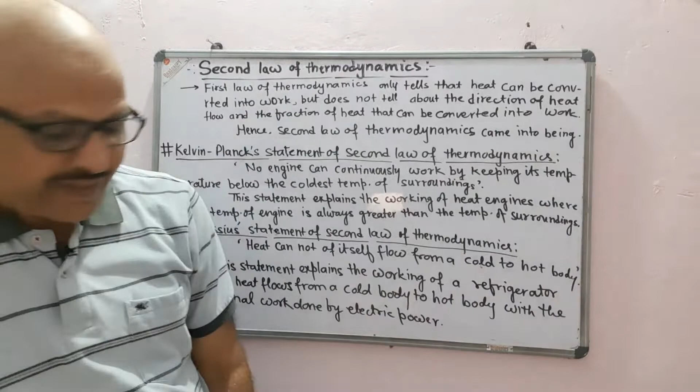Hello friends, next we start the second law of thermodynamics. As you know, the first law of thermodynamics only tells about the possibility of conversion of heat into work, but it does not tell what fraction of heat can be converted into work and what will be the direction of the heat flow. In order to explain these two things, second law of thermodynamics came into being.

There are two main statements of second law of thermodynamics. One is Kelvin-Planck's statement, and the second one is Clausius statement. First we discuss the Kelvin-Planck statement of second law of thermodynamics.

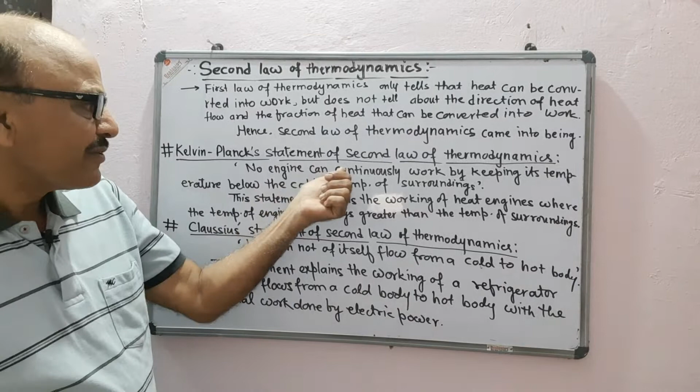It states that it is impossible to get a continuous supply of work by cooling a body at a temperature below the coldest of its surroundings. That is, no engine can work continuously by keeping its temperature below the coldest temperature of the surroundings.

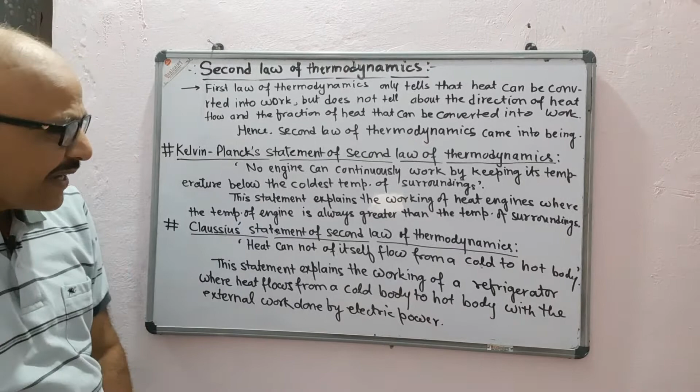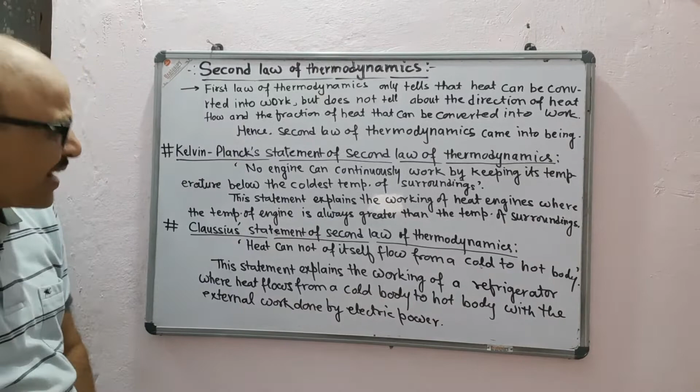This statement explains the working of a heat engine. In every heat engine, the temperature of the heat engine during working is always greater than the temperature of surroundings. This also explains that total heat cannot be converted into work, that is, efficiency of heat engine cannot be 100%.

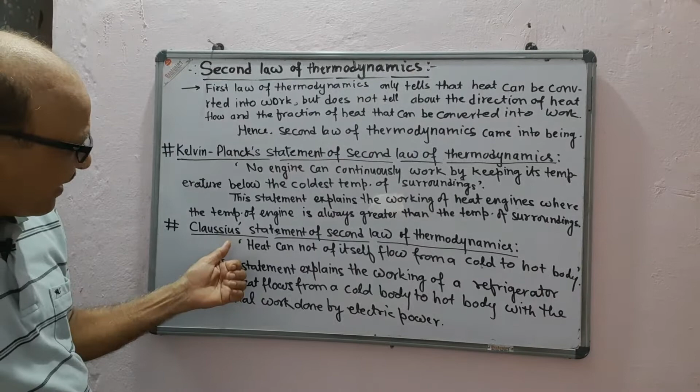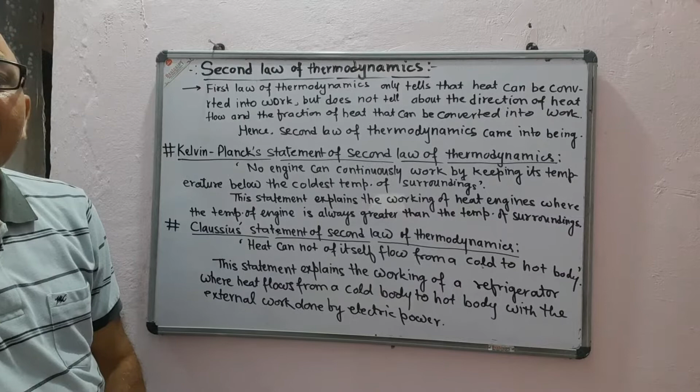Second statement is Clausius statement of second law of thermodynamics. It states that heat cannot flow of itself from a cold to hot body. That is, heat will not flow from cool to hot body by itself; it may do so only if some external force is applied.

This explains the working of a refrigerator, where heat flows from a cold body to hot body with the help of external work done by the electric power.

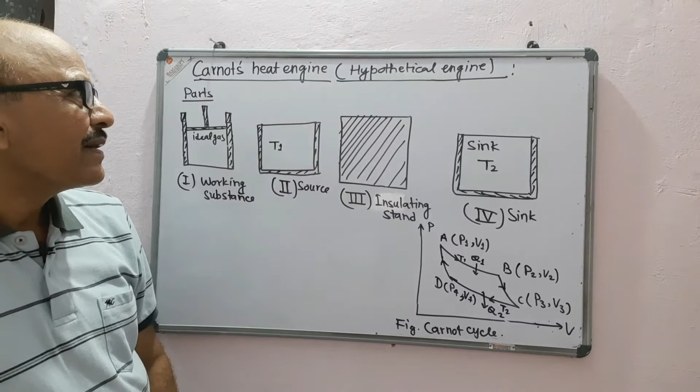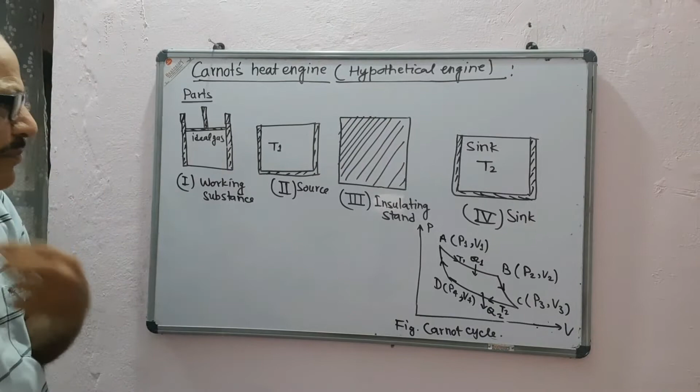Next we take the Carnot's heat engine. It is a hypothetical engine which cannot be constructed practically because it assumes all the required things to be perfect. For example, in these diagrams, double or thick walls represent perfectly insulating walls, and thin walls represent perfectly good conducting walls. The working substance is ideal gas, which is perfectly ideal gas.

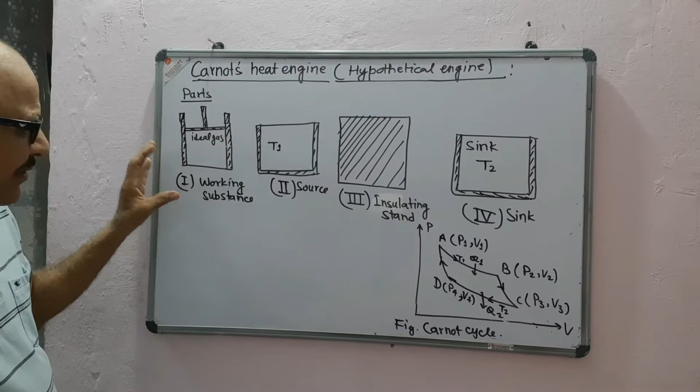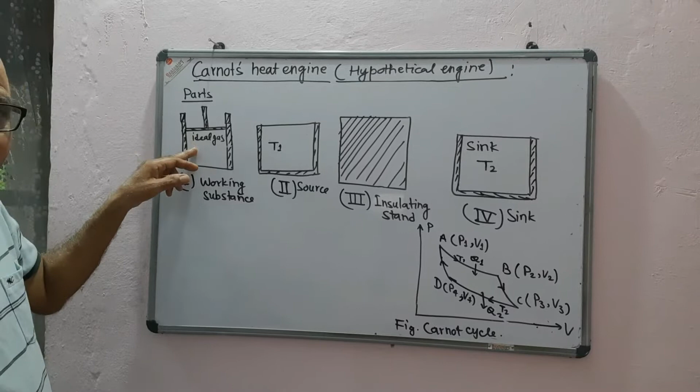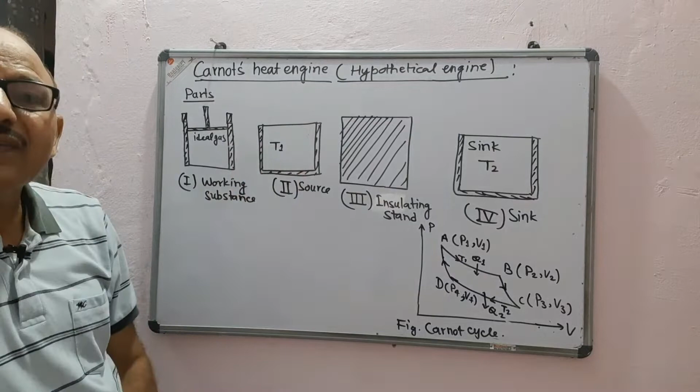The second one is the source having constant temperature T1 and infinite heat capacity. The third one is a perfectly insulating stand, and the fourth one is a sink at lower temperature T2 having infinite heat capacity. Now we consider the working.

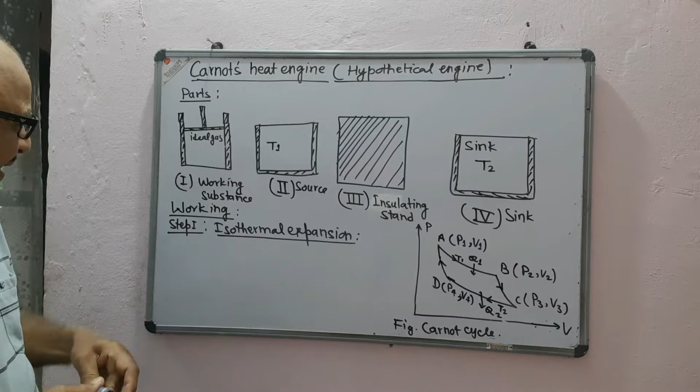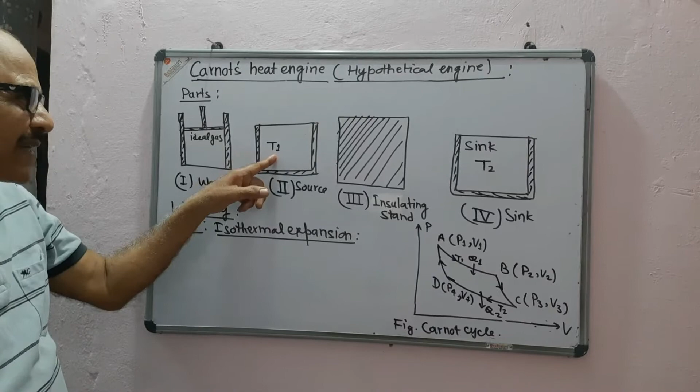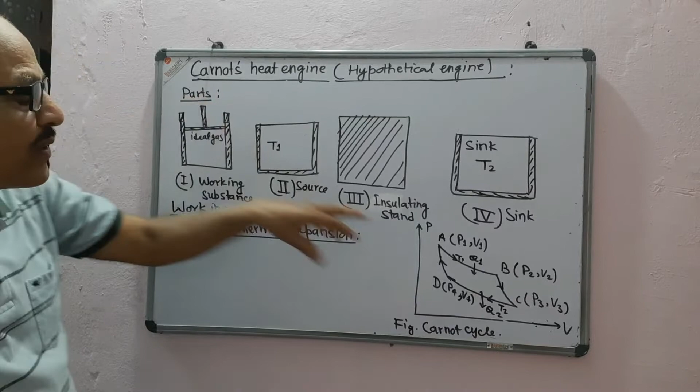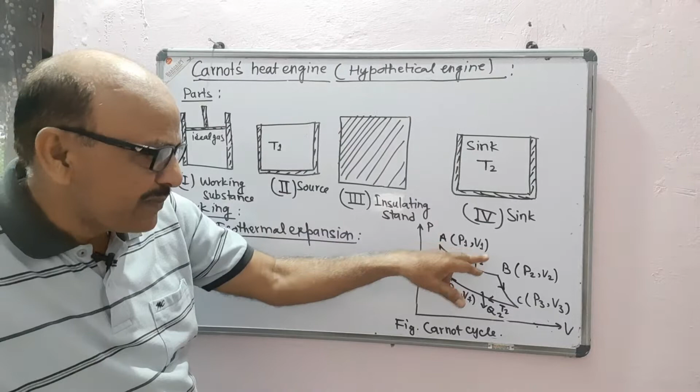Step 1 is isothermal expansion. First of all, the working substance cylinder, that is part 1, is placed on the source, part 2, and slowly expanded at constant temperature T1. Because the heat capacity of the source is infinite, its temperature remains constant. Thus, at constant temperature T1, the working substance draws heat Q1 from the source, and the process is isothermal expansion from A to B. At point A, pressure is P1, volume is V1, temperature is T1. At point B, pressure is P2, volume is V2, and temperature is T1. This is isothermal expansion.

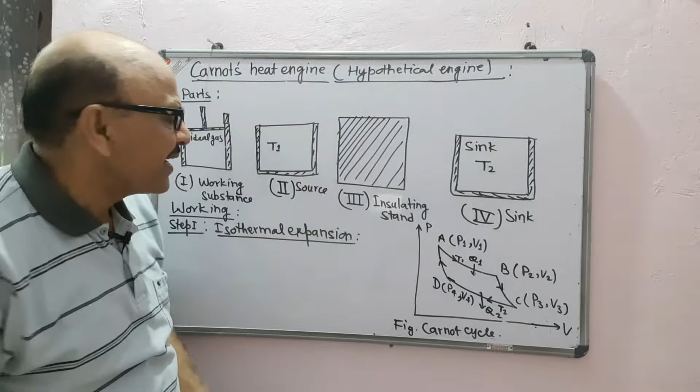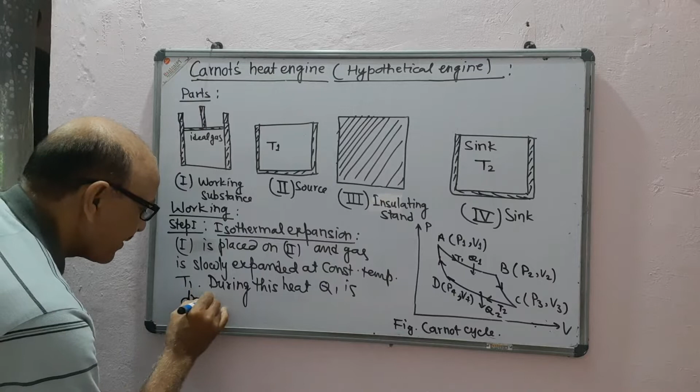Part 1 is placed on part 2 and the gas is slowly expanded at constant temperature T1. During this, heat Q1 is drawn by the working substance from the source. This is shown by curve AB of the Carnot cycle or indicator diagram.

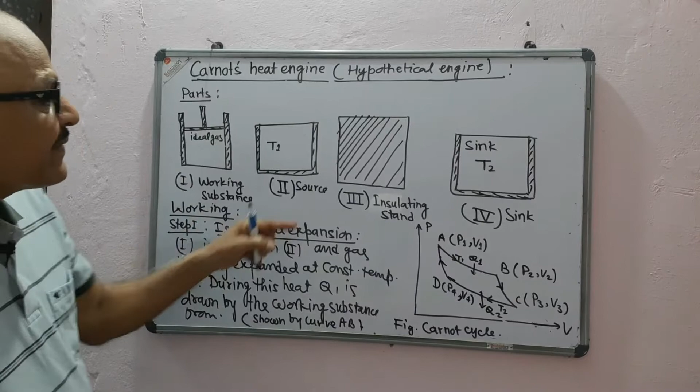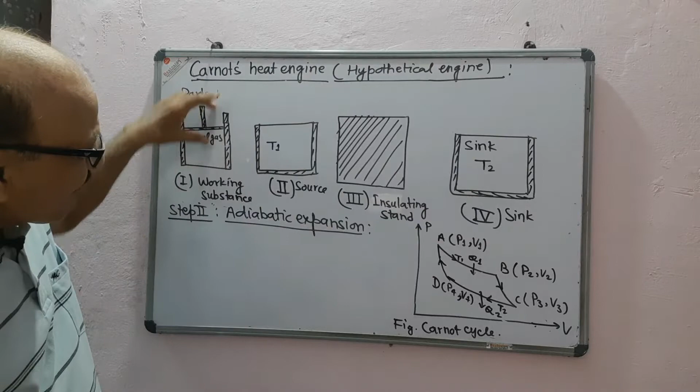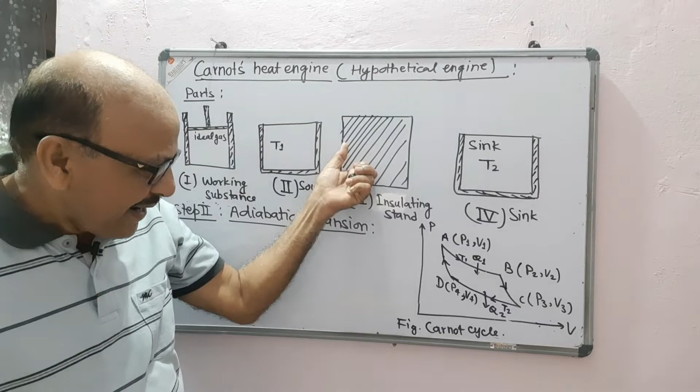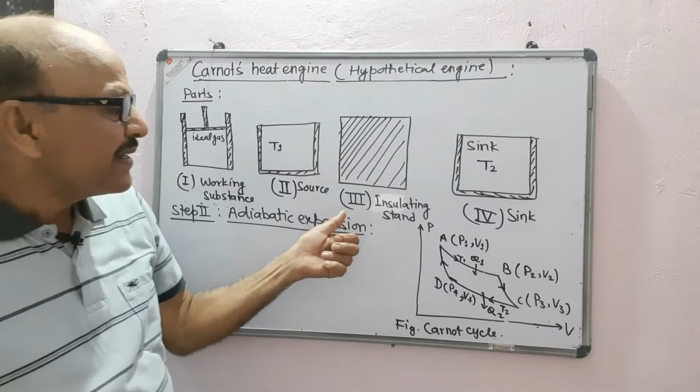Second step is adiabatic expansion. Now part 1 is placed on part 3, the insulating stand, and again expanded suddenly till the temperature of the gas becomes equal to T2. Thus the process is adiabatic from B to C.

So now part 1 is placed on part 3, the insulating stand, and the gas is suddenly expanded till temperature T2 is reached. This is shown by curve BC of the indicator diagram.

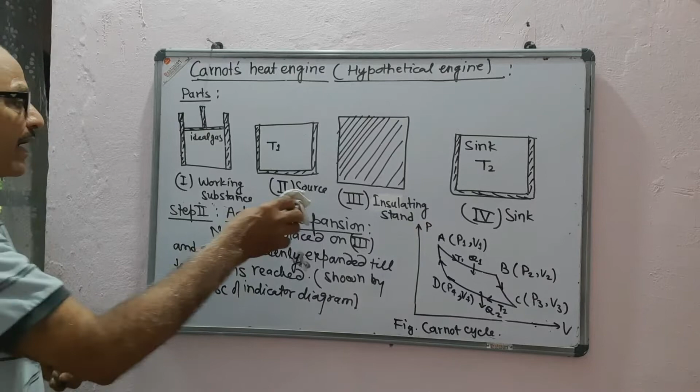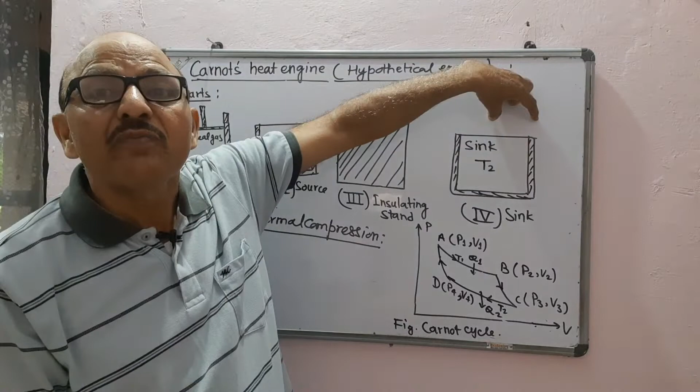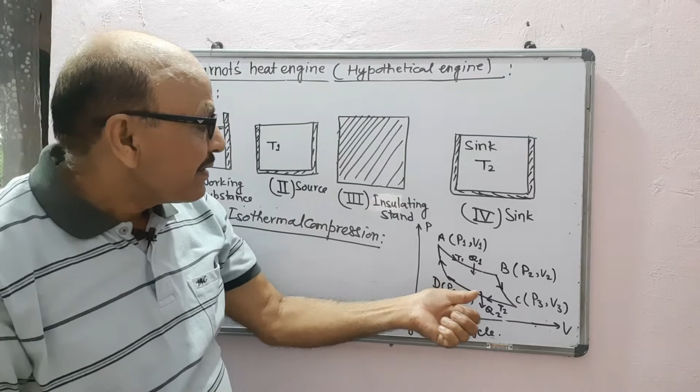Next, step 3 is isothermal compression. Now part 1 is placed on part 4, meaning the cylinder is placed on the sink, and compressed slowly as shown by curve C to D, at constant temperature.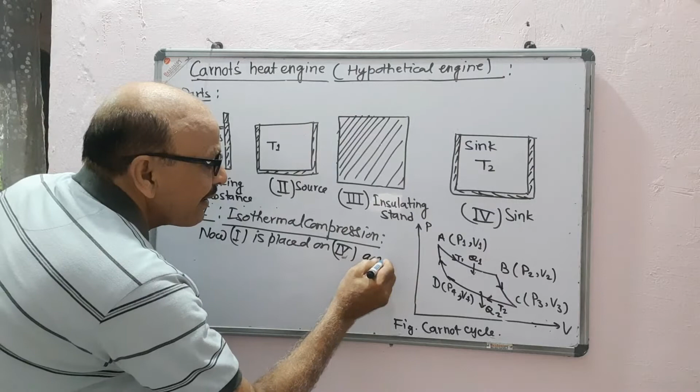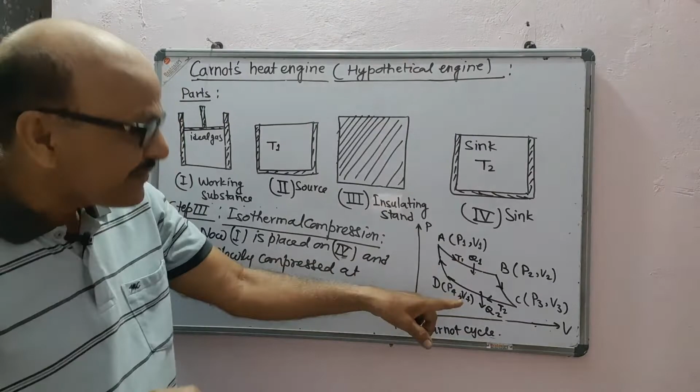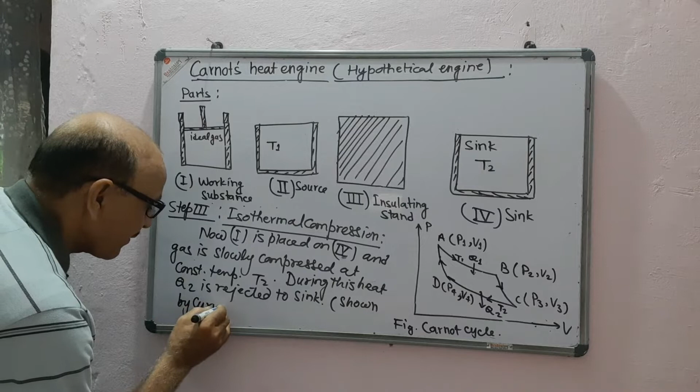Part 1 is placed on part 4, the sink, and the gas is slowly compressed, meaning isothermally, at constant temperature T2. During this, heat Q2 is rejected to the sink. This is shown by curve CD of the indicator diagram.

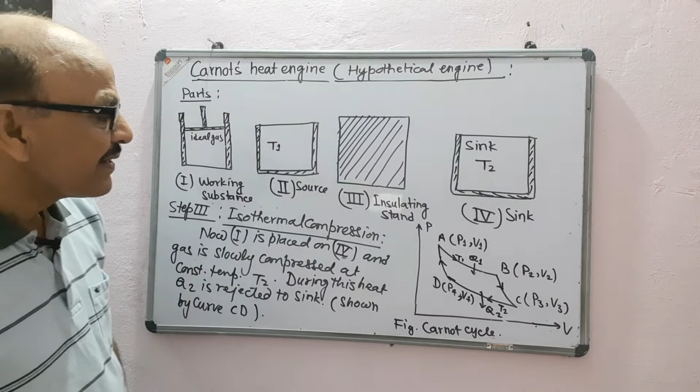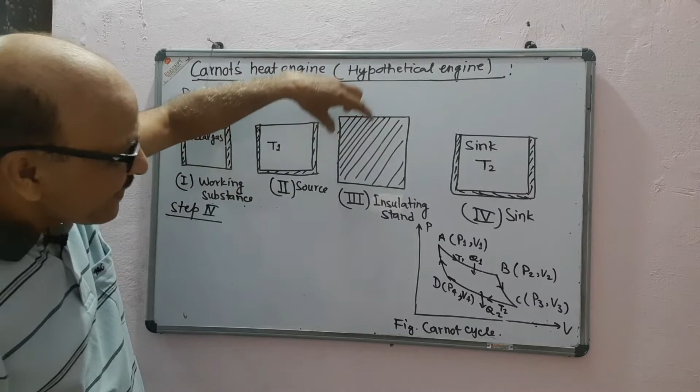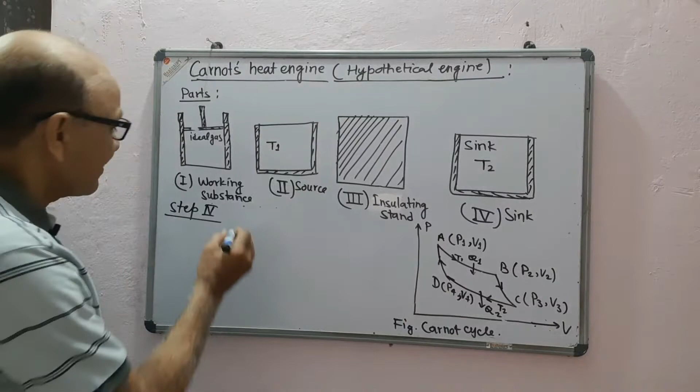Next step is adiabatic compression. Step 4: part 1 is again placed on the insulating stand and suddenly compressed till the initial state A is reached. This is adiabatic compression.

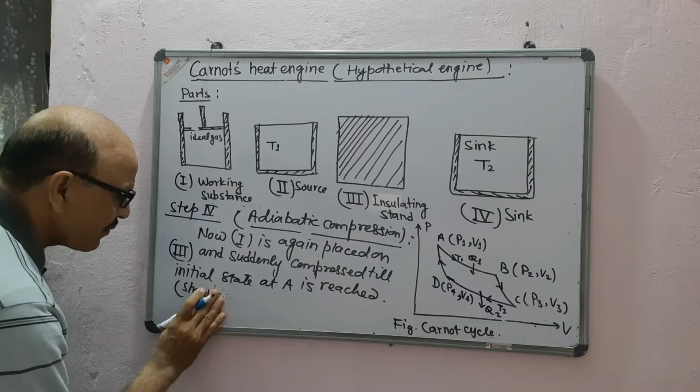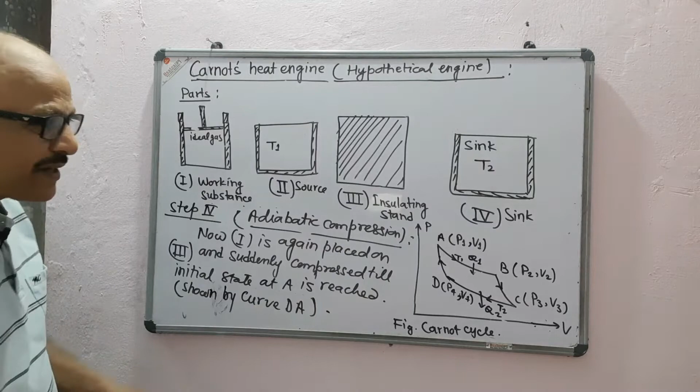Part 1 is again placed on part 3, the insulating stand, and suddenly compressed till the initial state at A is reached. This is shown by curve DA of the indicator diagram. This completes one cycle of operation, and this closed cycle ABCDA is known as the Carnot cycle.

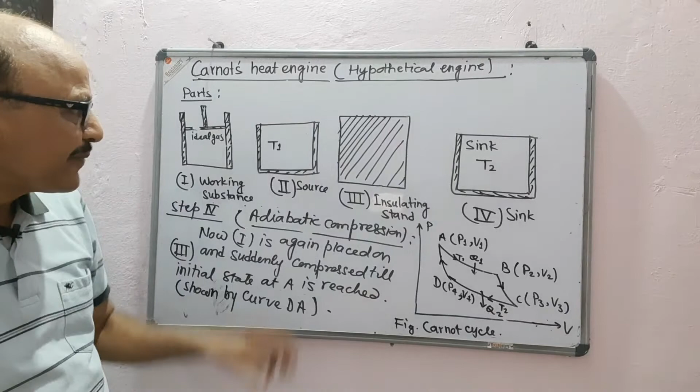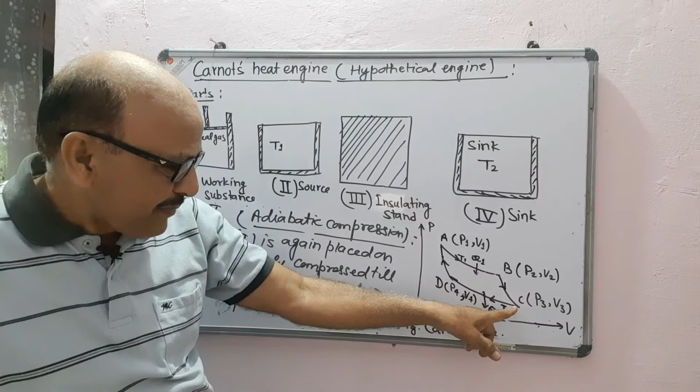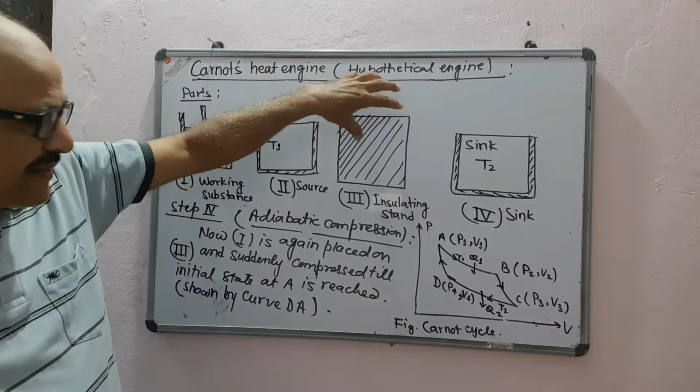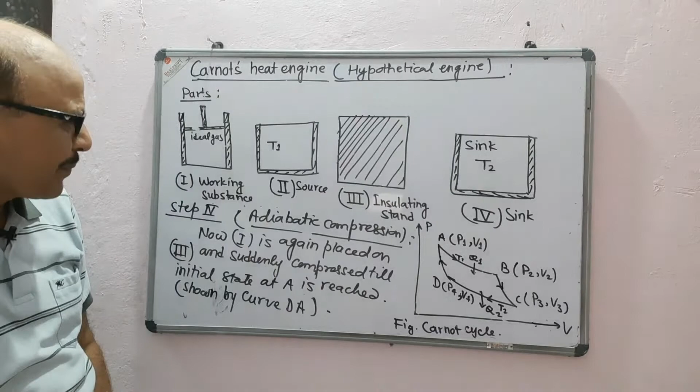Again I repeat the process. Part 1 is placed on part 2 and the gas is slowly expanded from state A to state B. During this, heat Q1 is absorbed by the working substance from the source at constant T1. Now part 1 is placed on the insulating stand and expanded adiabatically till sink temperature T2 is achieved, shown by curve BC. Now part 1 is placed on the sink and compressed slowly from C to D at constant temperature T2. During this, heat Q2 is rejected to the sink, and the last step is adiabatic compression DA, from D to A. Again part 1 is placed on the insulating stand and suddenly compressed till initial state A is reached. This completes one cycle of operation, called the Carnot cycle. Similar cycles repeat next.

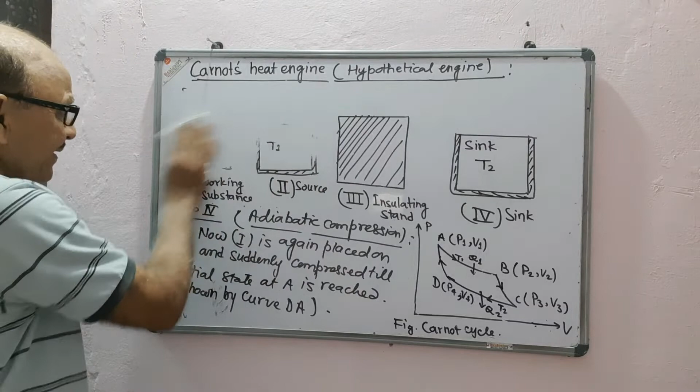Next we take the efficiency of Carnot engine.

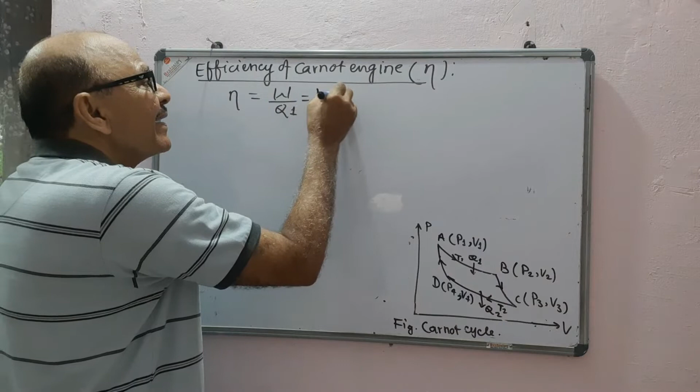Efficiency is denoted by symbol eta and is defined as the ratio of work done to the heat taken from source. This W is heat converted into work, upon heat taken from source.

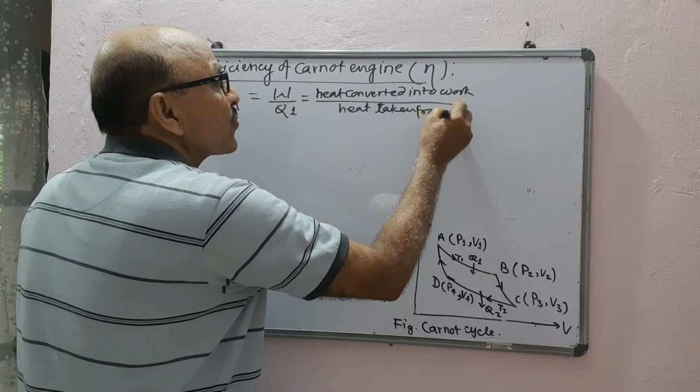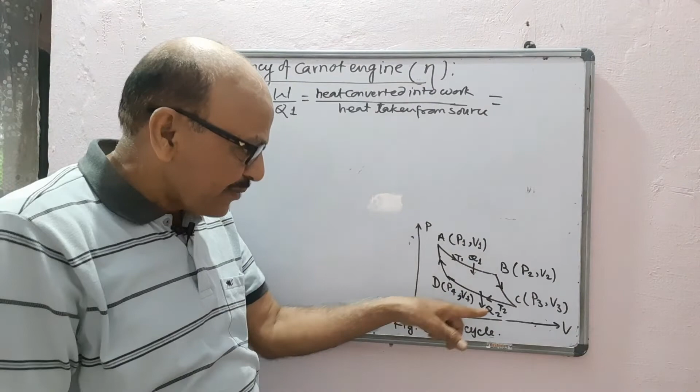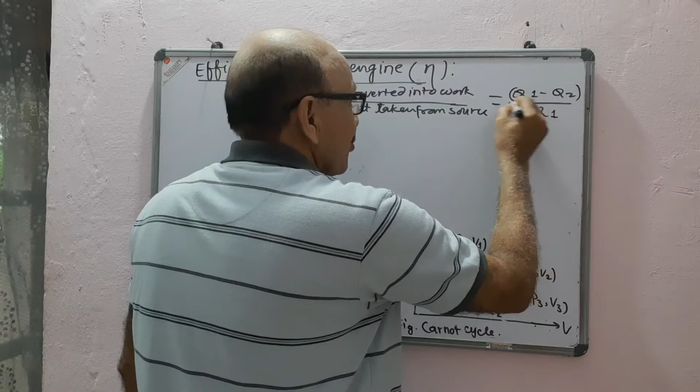Total heat Q1 was taken from source and Q2 is lost to the sink. So remaining heat Q1 minus Q2 is converted into work. So this is Q1 minus Q2 upon Q1, which can be written as Q1 upon Q1 minus Q2 upon Q1 plus

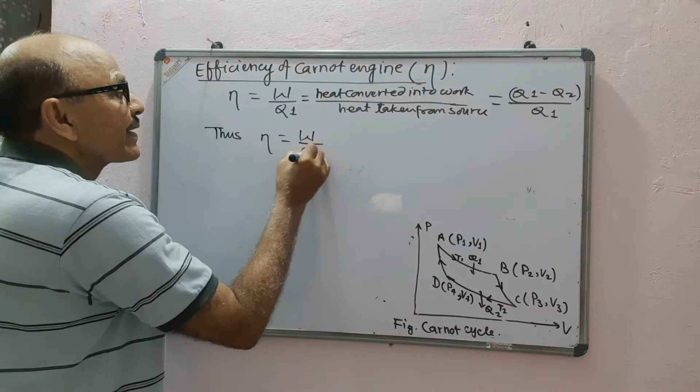Efficiency eta will be equal to W upon Q1, or 1 minus Q2 upon Q1, and percentage efficiency can be obtained by multiplying it with 100. We can also find the efficiency in terms of temperatures T1 and T2.

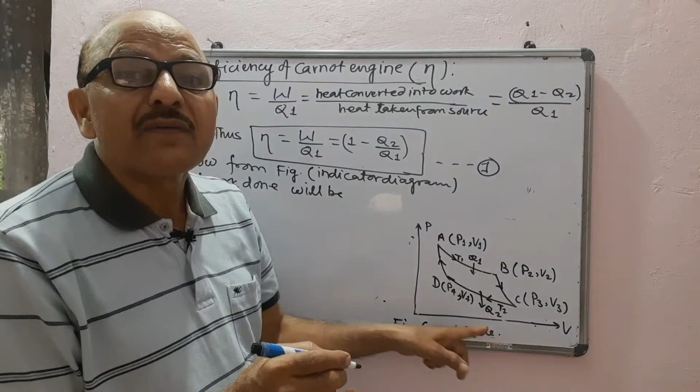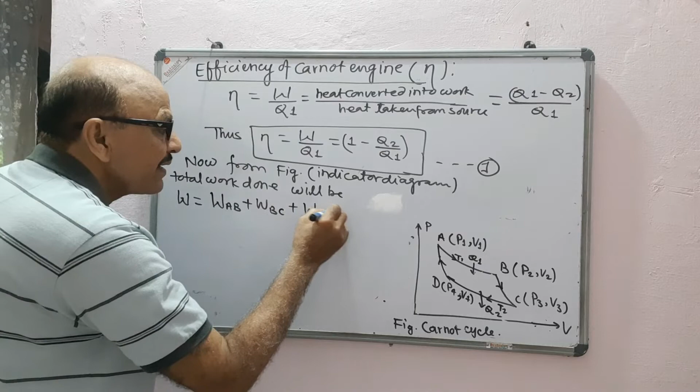From the indicator diagram, total work done will be, suppose you say W, so W from A to B, from B to C, from C to D, and from D to A. So W from A to B, W from B to C, W from C to D, and W from D to A.

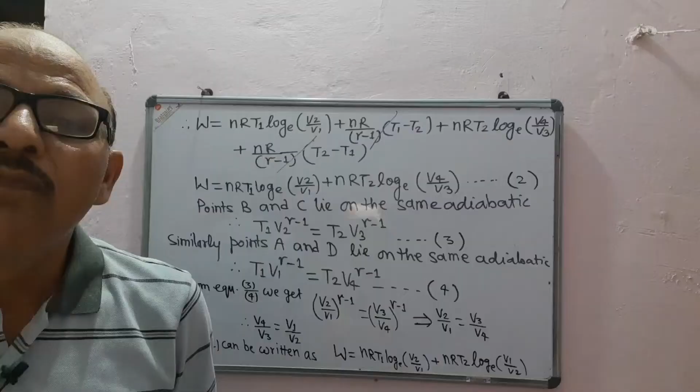Now, if the amount of working substance is n mole, then from the Carnot cycle, total work done W will be equal to: from A to B, isothermal process, nRT1 log V2 upon V1. From B to C, adiabatic process, nR upon gamma minus 1, T1 minus T2. From C to D, isothermal process, nRT2 log V4 upon V3. And from D to A, adiabatic process, nR upon gamma minus 1, T2 minus T1.

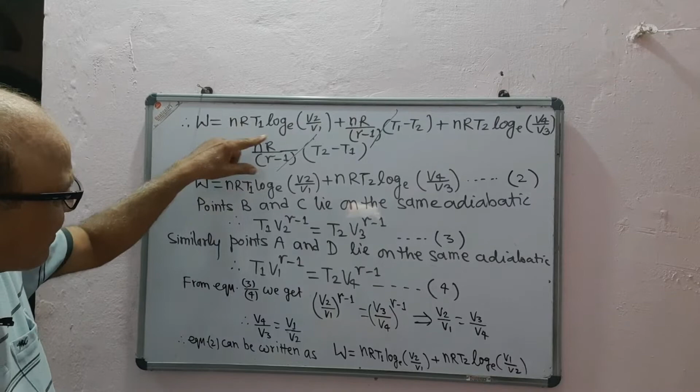Clearly these two terms are equal and opposite to each other and therefore cancel out, and the first and third terms remain. Therefore W will be equal to nRT1 log V2 upon V1 plus nRT2 log V4 upon V3. Suppose this is equation 2.

Now points B and C of the indicator diagram lie on the same adiabatic. Therefore T1 V2 power gamma minus 1 at point B will be equal to T2 V3 power gamma minus 1 at point C. Equation 3. Similarly, points D and A on the indicator diagram lie on the same adiabatic. Therefore T1 V1 power gamma minus 1 at point A will be equal to T2 V4 power gamma minus 1 at point D. Equation 4. Now dividing equation 3 with equation 4, T1 cancels, T2 cancels, and we get V2 upon V1 power gamma minus 1 is equal to V3 upon V4 power gamma minus 1.

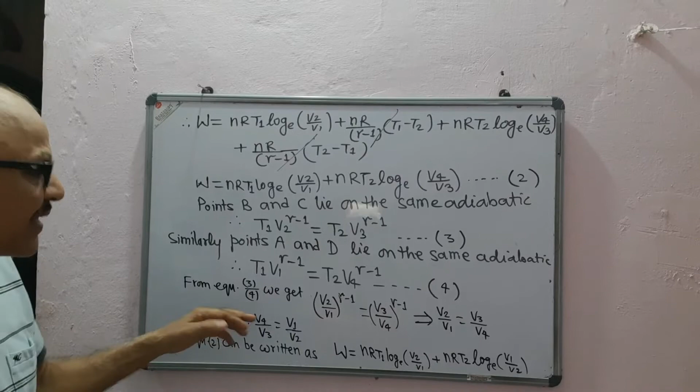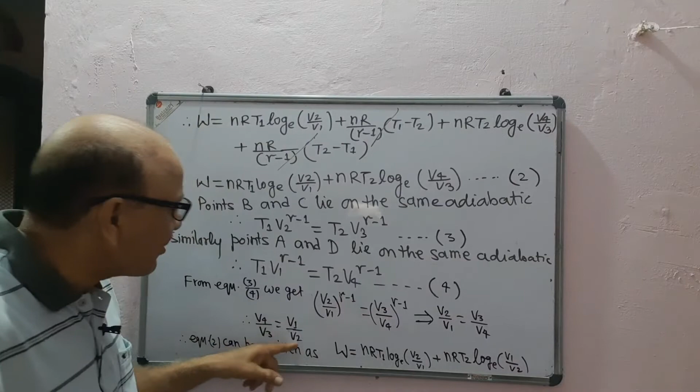Because the powers on both sides are same, therefore the quantities within the brackets will also be equal. That is, V2 upon V1 will be equal to V3 upon V4. Or interchanging the numerator and denominator, we can write it as V4 upon V3 is equal to V1 upon V2. Now this substitution may be made here, in place of V4 upon V3 we can write V1 upon V2. So equation 2 can be written as W is equal to nRT1 log V2 upon V1 plus nRT2 log, in place of V4 upon V3, V1 upon V2.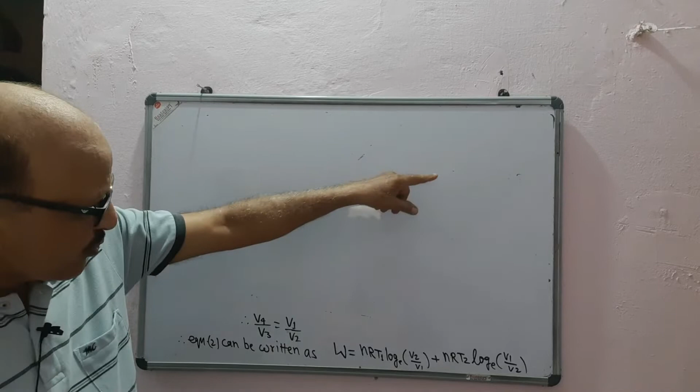From equations 2, 3, 4, suppose this is equation 5.

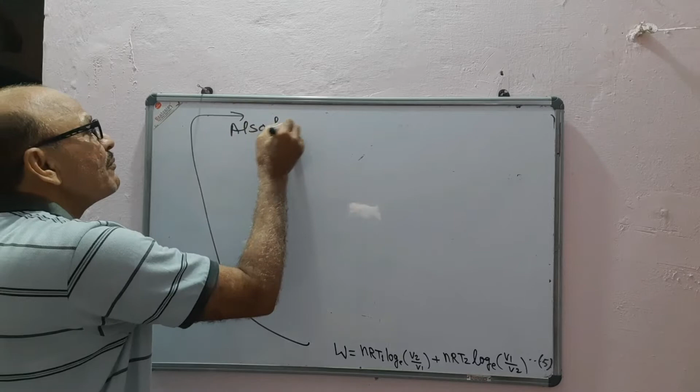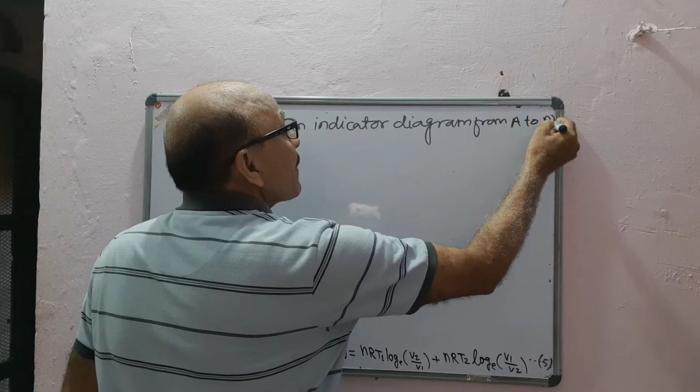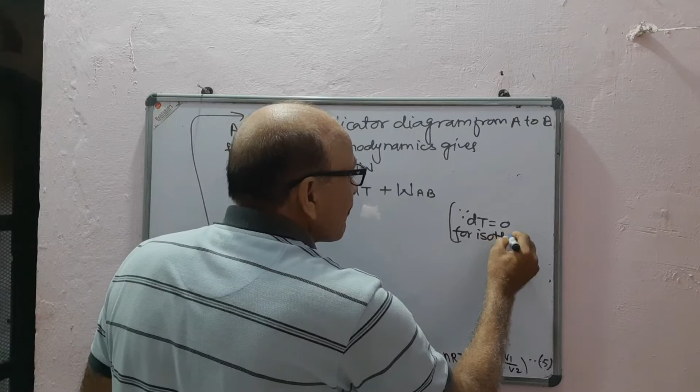Also from the indicator diagram, from A to B, the first law of thermodynamics gives dq is equal to du plus dw. That is, from A to B, dq is Q1, du is nCv dt, and dw is W from A to B, because dt is 0 for isothermal process. Therefore this becomes 0 and we get Q1 is equal to W from A to B, which is nRT1 log V2 upon V1. Suppose this is equation number 6.

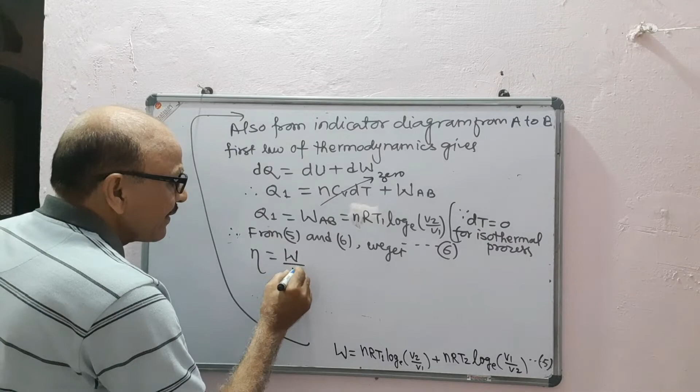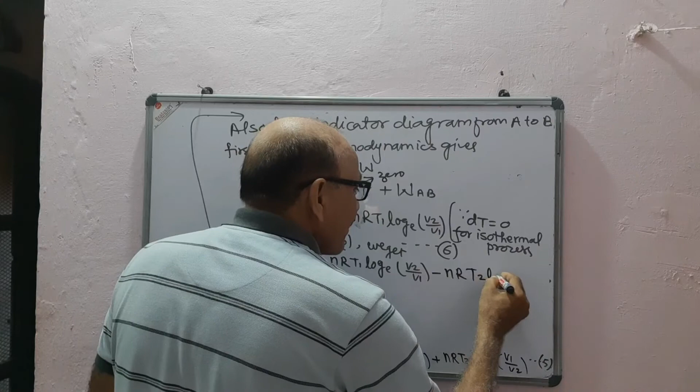Now with equations 5 and 6 we get efficiency as W upon Q1, which is W, nRT1 log V2 upon V1 plus this. When you interchange the numerator and denominator here, you get a minus sign, because log A upon B is equal to negative log B upon A. So you can write nRT2 log V2 upon V1. Here numerator and denominator interchange, therefore we get a negative sign instead of positive, and Q1 is nRT1 log V2 upon V1.

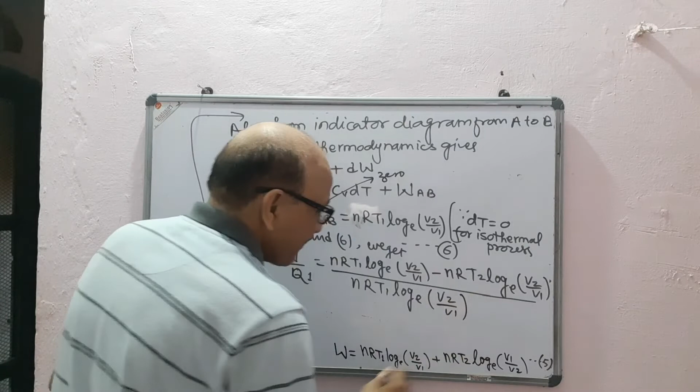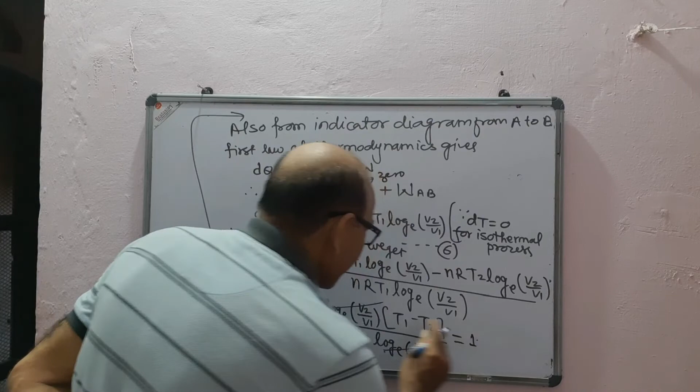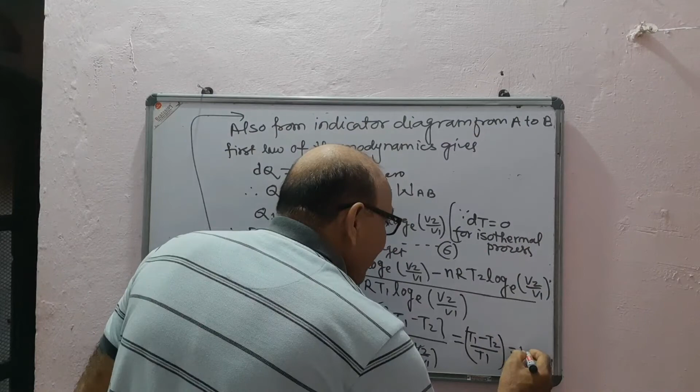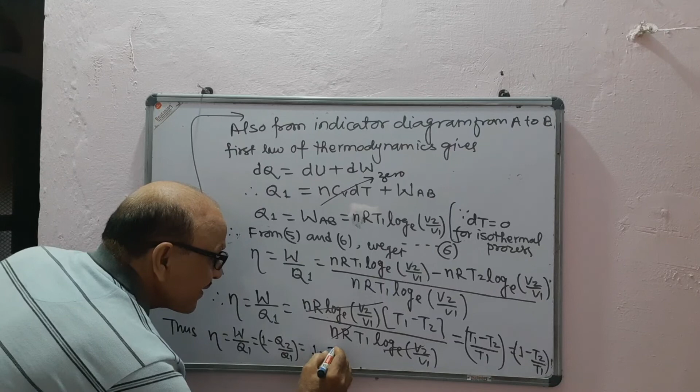Now nR log V2 upon V1 is common to numerator and denominator, therefore we get eta is equal to W upon Q1, which is equal to nR log V2 upon V1 times T1 minus T2, upon nRT1 log V2 upon V1. So nR log V2 upon V1 cancels out and we get T1 minus T2 upon T1, which is 1 minus T2 upon T1. Thus eta will be equal to W upon Q1, which is 1 minus Q2 upon Q1, or 1 minus T2 upon T1.